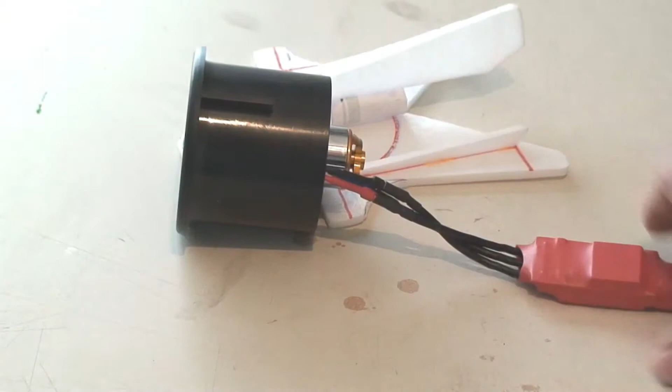It's an EDF. The whole point was to utilize EDF. This is one we got, I'm not sure, I don't know, anyways we got this one. It's a 90mm, I believe, could be wrong, but we're gonna go ahead and build something up to fit that. As you can tell, it's just a mock-up model, and that's the EDF we're going to use.

So here we go, just a simple design, different elevons in the back, rudder, and not going to put ailerons on it. Doesn't really need it, so we'll see what happens. We'll start sketching it up.

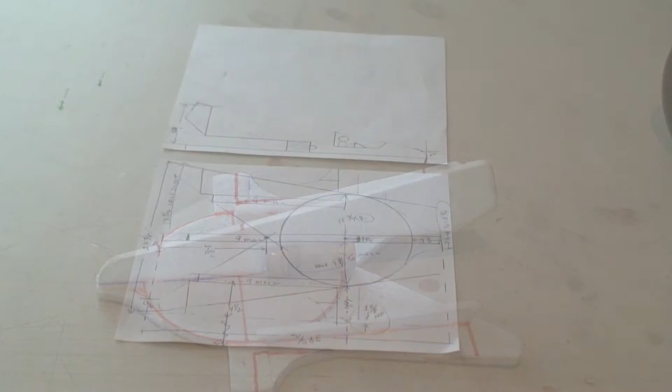Alright, we've taken and sketched up the mock-up model, and what I'm going to do is basically go 5 times the size that I've made, plus or minus a couple of different changes. Here we've got the basic layout, and gave myself some dimensions, and what I want to do too is utilize the whole sheet without trimming the length and the width.

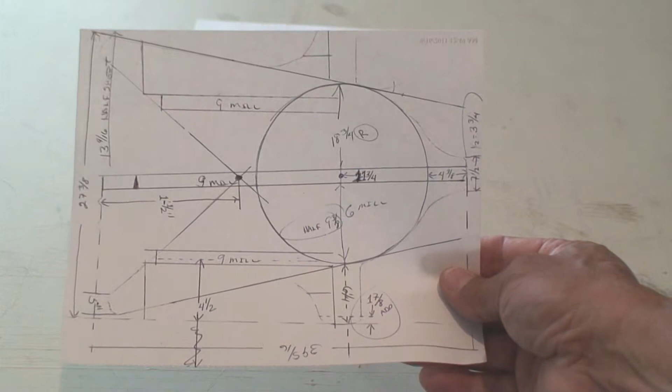We can cut, I'm going to cut out the pattern, but I just didn't want to waste any material, so I figured I'd use the whole thing. So there's the base, and here's the cockpit, it's all profile. So we're going to take that, lay it out on the Depron and see what we can come up with.

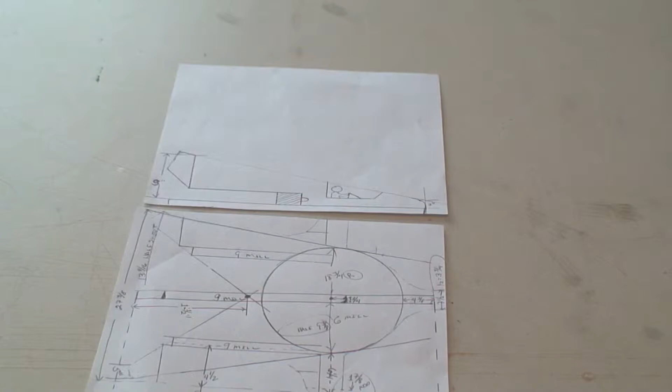Alright, here's a full sheet of Depron. I think it was like 20 by 38 or 39 inches, give or take a couple inches or 16ths. But anyways, there's the prototype, the mock-up model, and it's kind of hard to see because of the light shining through, but I've got the pattern all laid out, where I'm going to make my cuts, where the elevons are going to be cut, the nose, and then radiuses around where the winglet is. I've got cut up, I actually added on a couple of pieces to make it look like it had little flappers or kind of like little wings, just to add to the idea, and also to stay as close as I could to the mock-up.

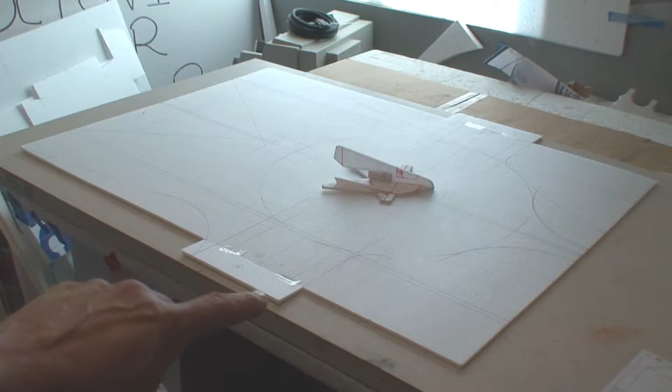So now my next move is to start cutting things out and glue the little winglets on. They're just Depron extensions for the wing, basically, like I say, winglet. And also cut some vertical fin and some stiffeners out.

Okay, here we are with the vertical fin, which is basically the fuselage profile. You'll see where I drew in the canopy or the cockpit area. And then we have the vertical stiffeners that are going to go out almost halfway between the elevon area and straight forward, something for strength, to keep it flat.

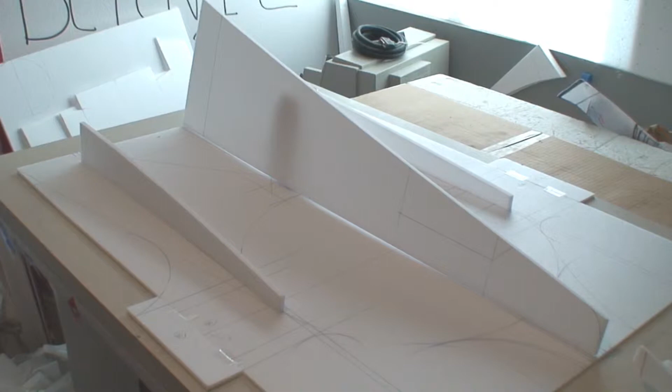Okay, here we go. I've cut out the shape of the fuselage, basically, and I also put a doubler. This piece here is a doubler for strength. I might put a dowel right across there, just about a 3/16 dowel from tip to tip for strength. I don't know yet, so we'll continue on with the build and see what I'm going to do.

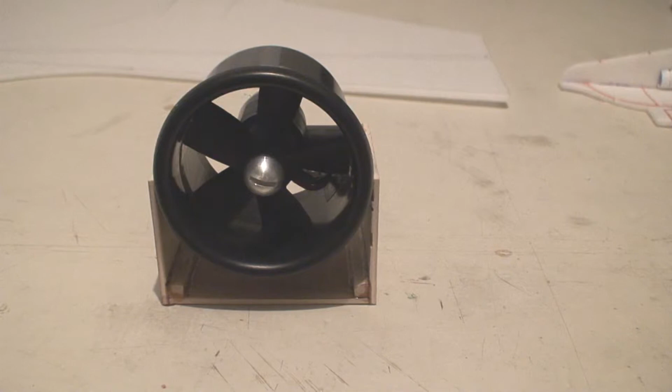I built this little box to cradle the EDF, and made a simple little stand. It's probably too beefy, but it should work. We'll see how it goes.

And then I'm going to run some wood screws or sheet metal screws to hold it in.

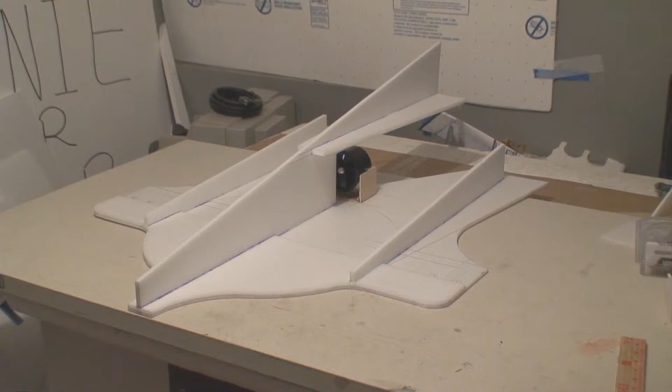So now at this point I've got to do something. I've got to stiffen out the tail. It's just hanging out there, so now I have to put some stiffeners on it, otherwise it'll break off. Alright, here's a profile view, looking at the left side, and just got to continue on adding stuff to it and get ready to mount the radio.

Okay, here we are. Major modification on the back side here. I decided to go ahead and brace it because the vertical fin, super weak, would just flop around. And also the flat from here to here, it was just really flimsy. So rather than put a stiffener underneath, I decided to go ahead and put a fillet all the way across the back there, one on each side.

And now I've decided I'm going to go ahead and put some landing gear on it, make it a tail dragger. I need the weight in the nose, so that'll help make it a tail dragger, landing gear up front. I'll just use some skids or a couple of small wheels for the tracking on the ground. So we'll see, this is what I have for landing gear now.

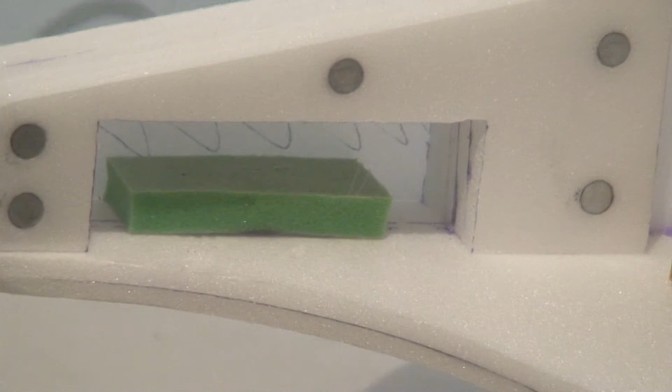Alright, here's a view of it with the hatch open. See the hatch sitting there on the table. I've got 5 magnets holding it on. I've just got a piece of foam inside in case I need a filler for the battery. I'm hoping that that will hold the battery in without Velcro, so we're going to see, because I don't really expect it to be a very aerobatic plane. I just want to try out the EDF and see what pulling or lifting capacity it has.

So I may put a little covering on it before today's test flight. I may just leave it the way it is. If I cover it before I leave the house, I will definitely post it. Thanks a lot, and wish me luck.

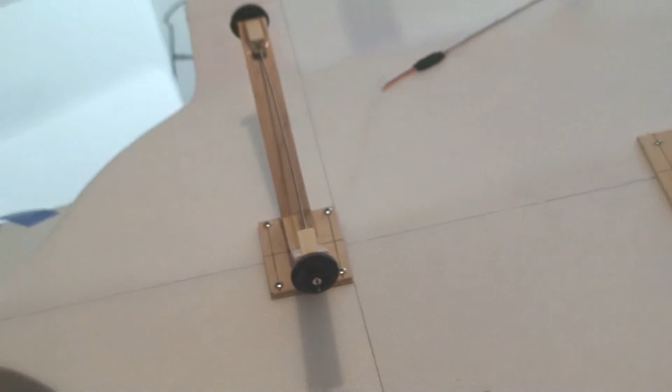Alright, here's something that I forgot to mention. I put the homemade landing gear on it that I made. I think I might have mentioned that sooner, but there's my landing gear, my main gear.

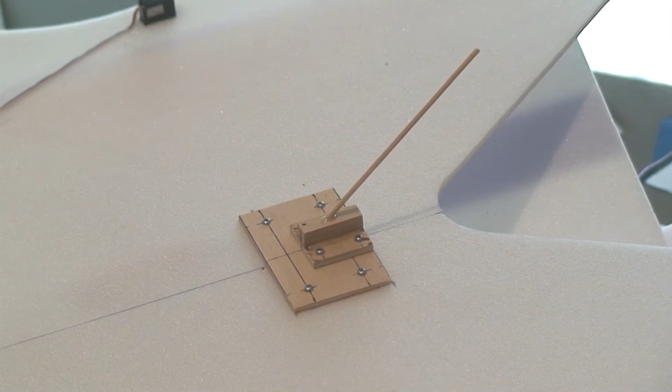Made it pretty much a tail dragger, and what I did was I took a piece of plywood - actually, that's the plywood holding the EDF on - and I made a little block and just screwed it on, and that's a bamboo stick, a skewer, bamboo skewer. Drilled a hole in it at an angle, give it just a little bit of a pitch, glued it in, and then screwed the plate on. So all I have to do is clip the end of the skewer to get my height so that the tail isn't too high up or too low down.

Looks like it's time to take it flying. We'll get some video on it, at least attempting to fly. See you guys at the flying field.